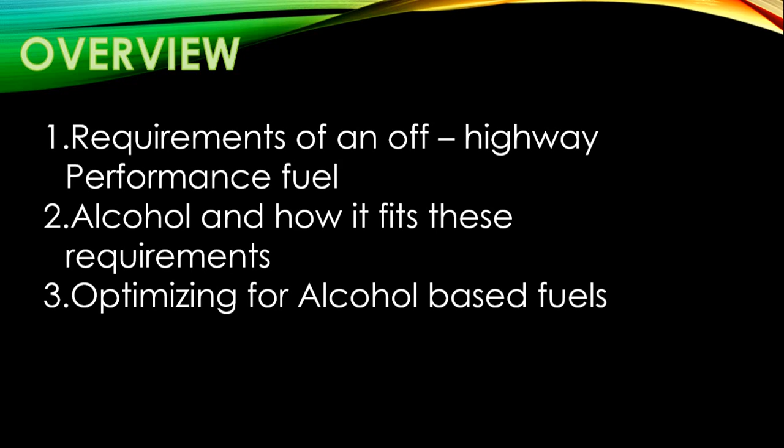First, we're going to look at the requirements of an off-highway performance fuel. We're going to look at alcohol and how it fits into these requirements, and we're going to look at optimizing for alcohol-based fuels.

These are important aspects to consider when choosing a high-performance fuel. First, we have octane, which is the ability of the fuel to resist detonation and/or maintain stable combustion after the spark plug fires. We have burn speed, which is the speed in which the flame propagates across the combustion chamber, influencing things like timing.

Energy value is the amount of energy that is released when the fuel is combusted, and the cooling effect is linked to the latent heat of vaporization value. This has to do with how much energy the fuel absorbs from its surroundings as it vaporizes in the intake and combustion chamber.

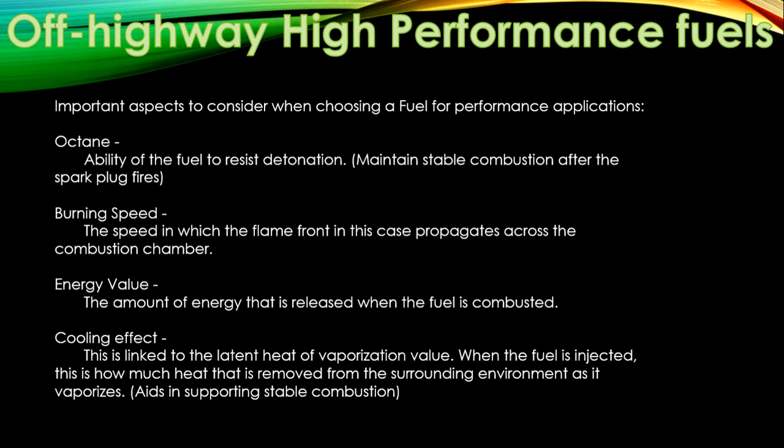So what is alcohol? Ethanol and methanol are both renewable fuels that can be produced from plant matter such as corn and wood. Both are also biodegradable. Ethanol is currently already used in 98% of pump gas sold in the United States as an octane booster and an oxygenate.

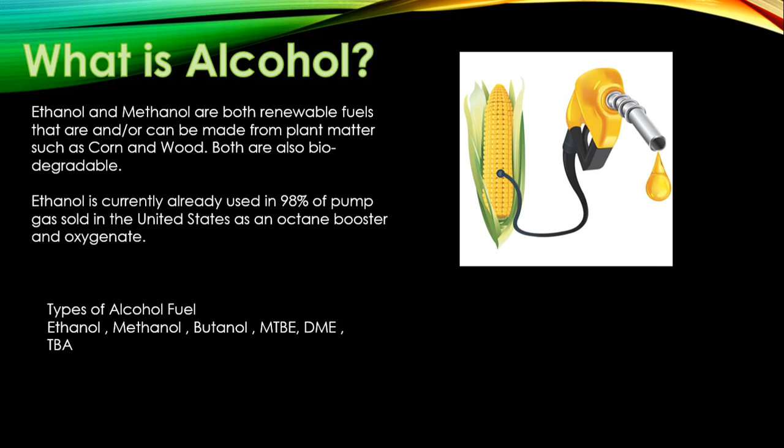Types of alcohol fuel include ethanol, methanol, butanol, MTBE, DME, and TBA, but for this presentation, we will mainly focus on ethanol and methanol.

Environmental benefits: ethanol is water-soluble and is safer for groundwater than petroleum pollution. Ethanol and methanol can be produced from renewable biomass feedstocks that include wood, waste crops, and potentially other forms of biological organisms such as algae in the coming future.

Ethanol, when produced, is an energy net positive, meaning that it takes less energy to produce a gallon of ethanol than the gallon contains in heating energy.

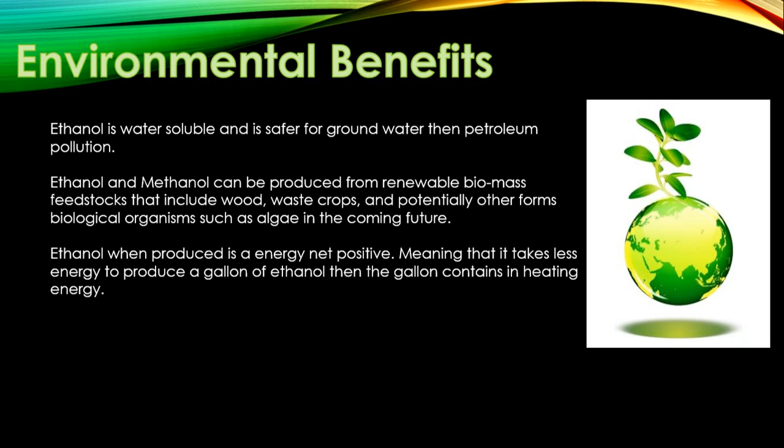Here we're going to take a look at how ethanol and methanol both compare to 100% gasoline. We have three fuels from VP Racing Fuels: VP 110, which is a leaded racing gas, which is 100% gasoline; VP E98, which is 98% ethanol; and VP M1, which is 100% methanol.

If we take a look at the AKI values, which would be the values on a U.S. pump handle, we have the VP 110, which has an AKI of 109.5. The E98 has an AKI of 111.5, and the VP M1 has an AKI of 111.

The energy content of the three fuels are as follows: VP 110 has 116,000 BTUs per gallon, VP E98 has 76,330 BTUs per gallon, and VP M1 has an energy content of 57,250 BTUs per gallon. The latent heat values are as follows: 155 BTUs per pound for gasoline, 396 BTUs per pound for the ethanol, and 503 BTUs per pound for the methanol.

Burn speeds are as follows: 0.4 meters per second for the 100% gasoline, 0.6 meters per second for the 98% ethanol, and 0.62 meters per second for the 100% methanol.

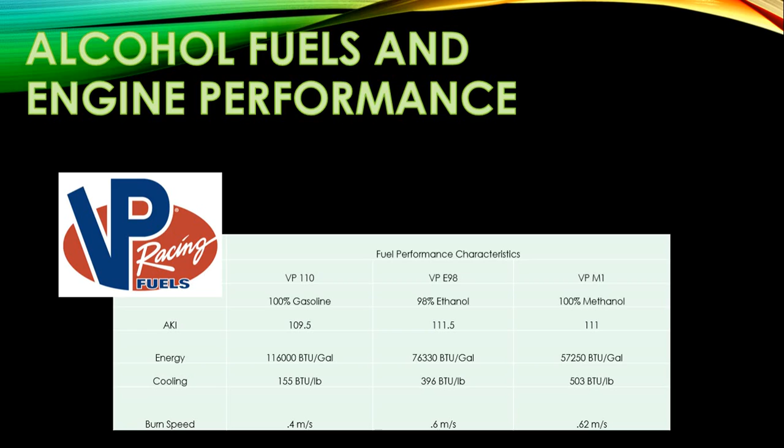Here we look at how the air-fuel ratios factor in during the combustion to determine the overall available thermal energy. In order to do that, we have our BTUs per gallon, but we also need our pounds per gallon of each fuel. If we look at the chart on the upper right-hand side, we will see our stoichiometric ratios.

The stoichiometric ratio is basically a mass to mass ratio. So if we have 14.7 in terms of gasoline pounds of air, we can combust 1 pound of gasoline. When we look at ethanol, the value drops. This is due to the fact that ethanol is an oxygenated fuel and carries some of its own oxygen to support combustion, so it doesn't need as much outside oxygen. We can combust 1 pound of ethanol with only 9 pounds of air.

And if we move down to methanol, it continues to lower.

So we can combust 1 pound of methanol with only 6.47 pounds of air. If we look at the equation in the middle of the slide, we can begin to see how the numbers will work out in order to achieve more energy availability.

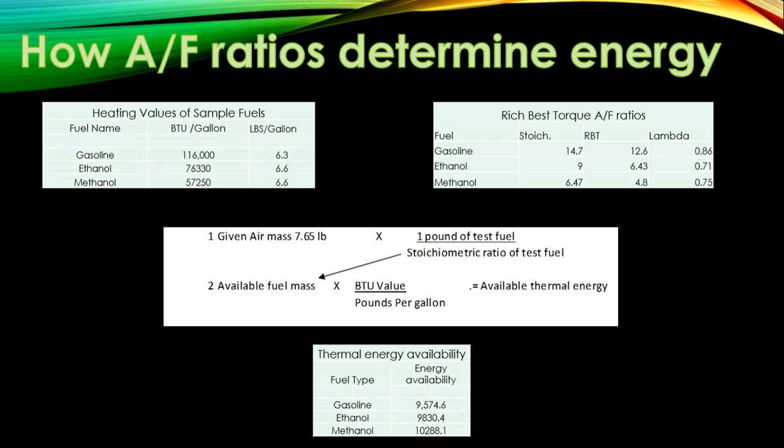So how do we optimize an engine to take advantage of this? As you can see, the main thing needed is more fuel delivered to the engine. To calculate the needed amount of fuel, we have this equation here, which will help in sizing components such as injectors, fuel pumps, and fuel lines.

To complete this equation, you'll need a few variables: the volume of the engine, the volumetric efficiency of the engine, the pressure in the intake manifold—which can be atmospheric, above atmospheric, or lower than atmospheric if restricted or force inducted—and the RPM at which max horsepower is reached, the desired air-fuel ratio, and the inlet air temperature.

With the desired air-fuel ratio, when tuning for performance, stoichiometric is not always desired. At maximum horsepower, the air-fuel ratio will be more towards what's known as the RBT value, or rich best torque. This is because during the intake stroke, a finite amount of oxygen is induced into the cylinder, and since combustion is not perfect, oftentimes more fuel is injected to ensure all the oxygen within the cylinder is converted into energy.

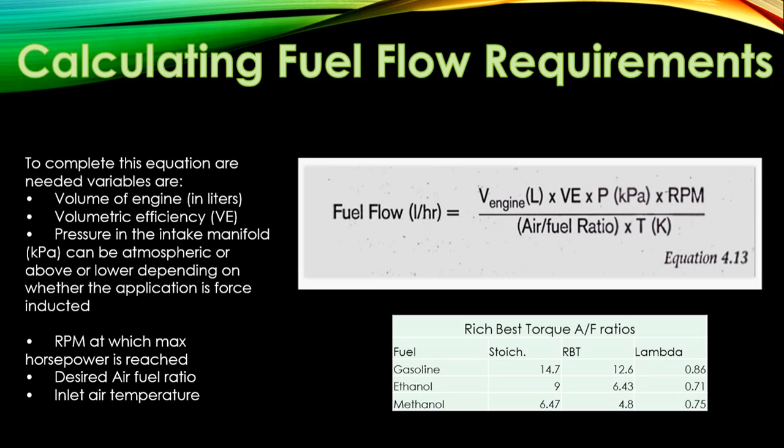For our example, we're going to use a GM LS7 engine. It has a displacement of 7 liters, a volumetric efficiency of 95%, just roughly estimating, a KPA of 101.325, which is atmospheric pressure since this is a naturally aspirated engine. It's going to have peak horsepower at 6,300 RPM, and we'll keep our inlet air temperature stable at 293 Kelvin, which is approximately 20 centigrade, or roughly 68 degrees Fahrenheit.

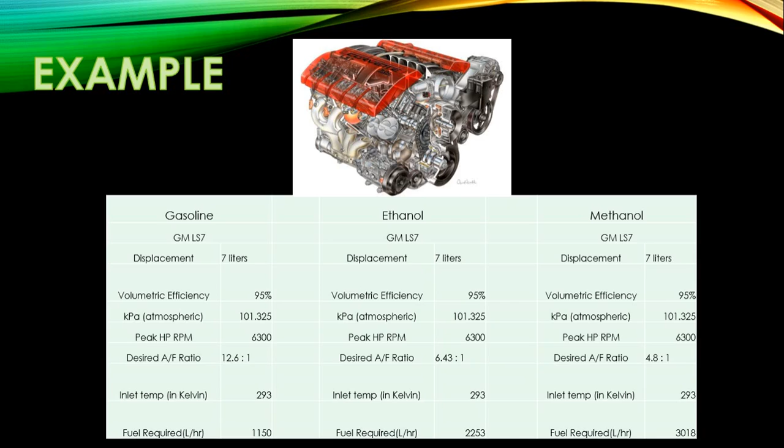As you can see, the fuel requirements almost double going from gasoline to ethanol, and almost triple going from gasoline to methanol. So some substantial upgrades could be necessary to take part in the benefits that alcohol fuel can give an engine, in order to ensure you don't exceed 80% duty cycle with various components, such as the fuel injectors or fuel pump.

Just to recap, alcohol-based fuels more than have the capability to replace leaded gas and are better for the environment. Due to the increased fuel flow, fuel system upgrades are necessary to ensure optimal performance, as we saw in the previous slide. Power increases can be seen in the neighborhood of 3 to 7% just from changing fuel, with more available through its other properties, including its high latent heat value and faster burn speed, which can influence things like timing and intake air temperature, which can influence things like the density of the air charge, which all play a role in how much power an engine will produce.